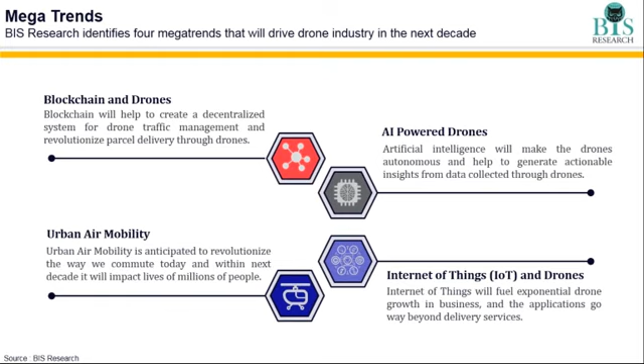However, the collected data is meaningless if it is not converted into insightful results. But thanks to technologies like data analytics, the collected data can now be converted into actionable insights. To give you context, the acquisition of data analytics provider Redbird by drone service provider Airware way back in 2016 shows that the roots of this trend go way back in time.

Now, I cannot emphasize enough that drone delivery is another major avenue that will solve real life problems. The usage of drones for parcel delivery is currently very limited owing to factors such as absence of a traffic management system, improper regulations, lack of trust in current technologies, etc. However, thanks to the ongoing efforts by FAA and NASA, the condition is changing and it is changing very quickly.

The third shift the industry is currently observing is from hardware to software. To give you an example, in 2016, a drone manufacturer in the US named 3D Robotics completely shut down its drone manufacturing business and became a drone service provider.

Another shift is the UTM system, which is expected to be a decentralized system involving a lot of stakeholders. At present, a series of companies ranging from drone service providers to retail giants to communication companies are all collaborating with NASA in order to create an architecture of UTM.

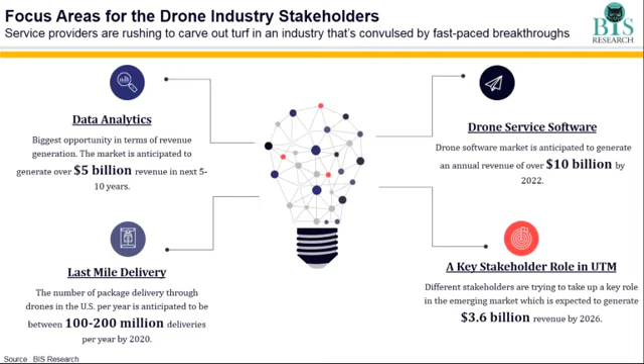To talk about LiDAR, before the advent of drones, it was largely limited to collection of aerial data through airplanes. It was a costly affair and involved a lot of human intervention. But since the advent of drones, LiDARs are now being used in surveying historical sites and agricultural lands to gauge weather changes, and all of this is being done at less cost and more efficiently.

Now, if you talk about sense and avoid systems, and you are someone from the regulatory authorities, you don't want to wake up to the news of a flying drone colliding with a manned aircraft and claiming lives. But thanks to sense and avoid systems and the developments in this area, this fear is diminishing day by day. For the successful implementation of the UTM system as well, the sense and avoid system needs to be 100% perfected.

If you talk about battery, it is one of the vital parts of drones, and for the successful delivery of medicines or other parcels, the battery backup time needs to increase, and that's where more of the developments are going to come in the future.

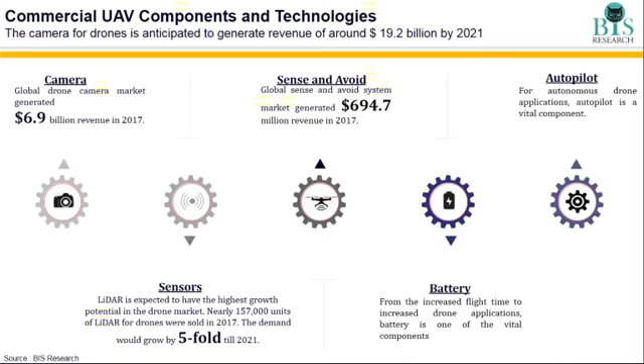Now let us talk about the geographical distribution of revenue generated in the commercial drone market. North America is clearly the dominant region in this sector. Players from across the value chain, be it component suppliers, manufacturers or software providers, are all present in the region. Interestingly, the leading drone manufacturer DJI, headquartered in China, which has acquired nearly 65% market share in the commercial drone industry, considers North America the region contributing the major share of its revenue.

Asia Pacific is just next in line. The declining cost of drones is one of the prime reasons behind their wide acceptance in the price sensitive countries of the region. Along with that, urbanization and industrialization have driven a high demand for drones in these countries.

Now, if you talk about Europe, a very interesting thing about European countries is that many of them opt for a very liberal approach towards the adoption of drones. In France, beyond visual line of sight operation has been allowed in many parts since 2012. And in Germany, Domino's is delivering pizzas on the sidewalks in many parts of the country. However, different laws for drone usage in different countries are a big challenge, and that is being tackled by the European Union.

Now, on the basis of end users, drones are solving several real-world problems, be it increasing the yield of farmers through precision farming, efficiently detecting any leakage in oil and gas pipelines to avoid big accidents, or creating maps of mines in places which are inaccessible. The list goes on. And thanks to the technology, most of these works are being done effortlessly and efficiently.

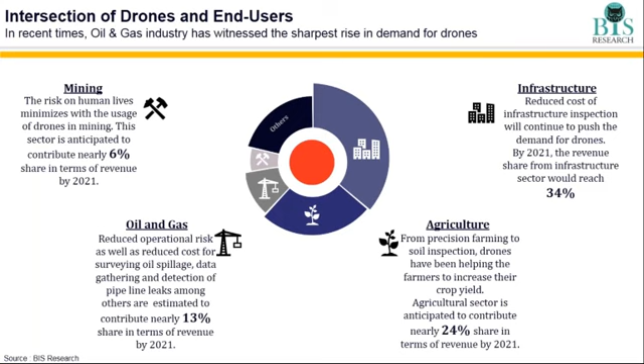I would like to invite Mr. Chris to throw some more light on the end user perspective of the drone industry.

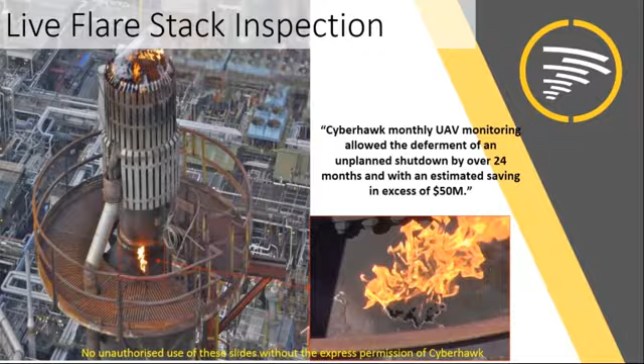Here we have a flare that is in the North Sea, and what we can see is a circumferential crack around the flare tip, and we can see a lifting pad that is coming off the flare tip. Now what you're not able to see in this image is that this is 125 meters off the deck, and the flare tip overhangs the structure of the platform, and should this piece of metal fall onto the platform below, it would definitely have catastrophic results for the plant if it fell on a piece of pipework or a valve, but similarly if it fell on somebody's head, it would kill them.

So we monitor this defect, we measure it, we send a team out there every month, and the oil company is then able to verify that the crack is not getting any larger, they're in control of the defect, and no need to shut down the asset. So all the time we're trying to save the facility from being shut down. If you go to the next one, please.

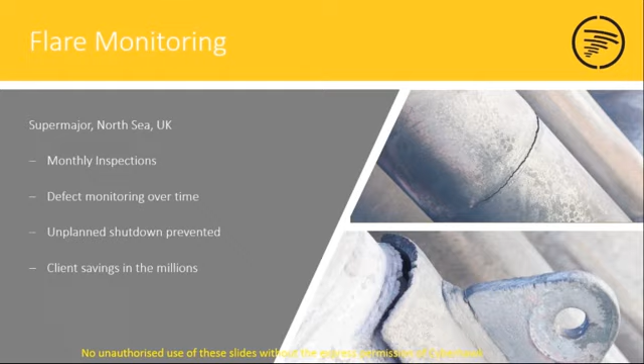Another example, these are all big numbers. This time we did a flare inspection in Nigeria, and we inspected 5 flares in less than a week while the plant was completely operational. They didn't believe that they had any issues with the flare tips, and we found that 3 of them were severely damaged, and they ended up ordering new flare tips on the advice of our findings.

And one of the limiting factors with the design and manufacture of flare tips is that if you wanted to order a flare tip today, it would typically take you more than a year to receive that new flare tip. They don't keep them in stock. They're made of exotic stainless steel materials, and they're made to order. And if an oil company wants to buy one at short notice, then they get charged an awful lot of money for the short turnaround of that.

Some facilities keep spares, but in this case, this facility in Nigeria did not have spares. And so they were able to order their replacement flare tips in time. They didn't have to shut down the asset to do the inspection, and their figures in terms of savings were $11 million savings to the client. So all the time when people ask us how much money we're saving, it tends to be in the millions of pounds. Next slide, please.

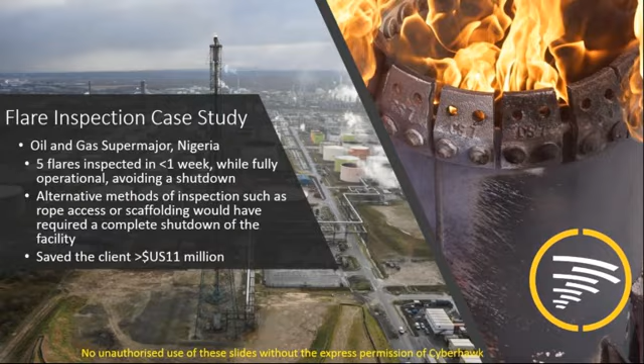Another use case that's very familiar to me and close to my heart is doing underdeck inspections. In this case, the underside of an oil and gas platform offshore, very difficult to access. When I was working offshore, I would wear a safety harness, roping, caving equipment, and I would abseil underneath the platform, and then I would use wire slings, pass them through the structural steel, and then I would maneuver underneath the deck. Quite dangerous and very difficult to do. If you go to the next slide.

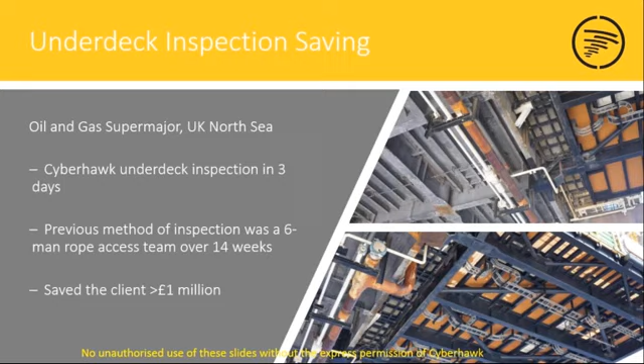For this particular platform, we were able to carry out the underdeck inspection in 3 days. It was done previous to this by a 6-man rope access team, and it took them over 14 weeks to do the same type of inspection that we've just done in 3 days. So saving the client over £1 million. Next slide, please.

At the same time that we can do the underdeck inspection, we try and inspect all of the difficult, cumbersome places that there are to do inspection offshore. So we'll fly right down to the water level, and we'll inspect the jacket legs, which is the structure which holds the platform up. We'll inspect the risers and the caissons, which are the pipes that bring the oil and gas up from the seabed, all without the need for anybody to put themselves in harm's way.

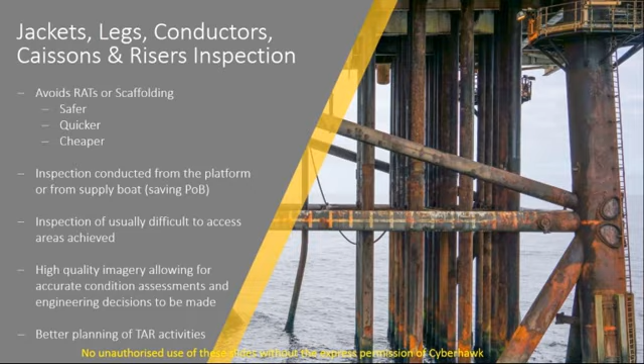And if you go to the next slide, we recently did an inspection campaign offshore where we did 64 platforms in 6 weeks. The inspection was all done from the back of a boat. Much faster, tangible results, so 100% access to all areas with imagery to back up those findings. And another way that the drones can really be used to save time and money. Okay, next slide, please.

One of the most recent world firsts that we did was the internal inspection of a cargo oil tank. And as I speak, we have a team in Singapore carrying out the internal inspection of a cargo oil tanker. We fly around all the structural components within the tank, and we get close-up visual inspection of those areas. And because of our knowledge of the defects within those tanks and our inspection background, we're able to classify and describe the findings within those tanks and do it completely remotely.

Just to give you an idea, the saving for staging: this oil company, if we weren't able to do it with a drone, would have used staging or scaffold, and for the tanker alone, it was a $1 million saving for just the scaffolding. And next slide, please.

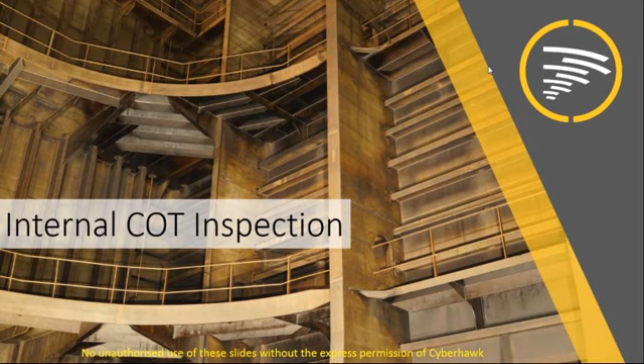Here you can see the drone in the foreground. You can see we use a number of different drones. In this case, you see the Falcon 8, but we also use the Flyability Elios. We fit lights to the drone and we fly, as you can see, near a bulkhead there, sort of a wall within the tank, and we're inspecting the web and the flange of the structural steel.

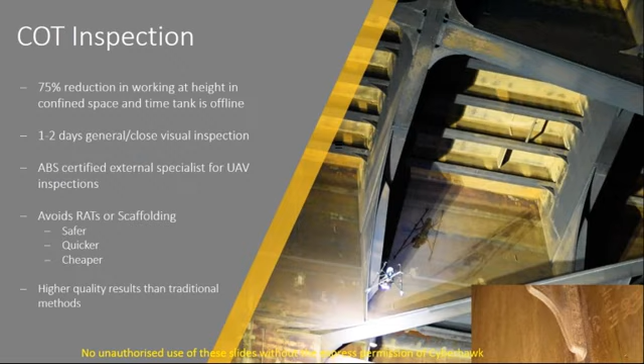A 75% reduction in working at height. It took us 1 to 2 days per tank. And of course, nobody needing to climb or work at height. I must say that at the moment, we are still required to go into the tank. We are in there flying with the drone, watching it, because the sense and avoid systems aren't reliable enough. But it's still a far cheaper and safer way of doing it than using rope access or scaffold. And next slide.

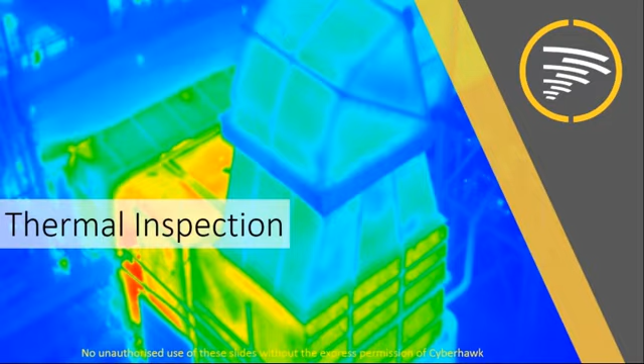So when we carry out inspections, one of the tools that we always carry with the drone is a thermal camera, infrared. If you go to the next slide, you'll see that we can use a camera to determine hotspots. This is a radiometric camera, which means that every pixel on the camera can give you a corresponding temperature reading. What you must do first of all for it to be accurate and valid is test the emissivity, so you need to know the values. So test the camera on the ground with a similar material so that your corresponding temperature range is reflective of what you find when you fly.

And in this case, what we're able to find on this ducting in a refinery is that some of the panels of the insulation had fallen off. In this case, they're indicated with a slightly yellowing color scheme. And that means that the internal refractory on the inside had fallen off. So the refinery owner is able to order materials ahead of time before the shutdown, before the turnaround, and be prepared. Next slide, please.

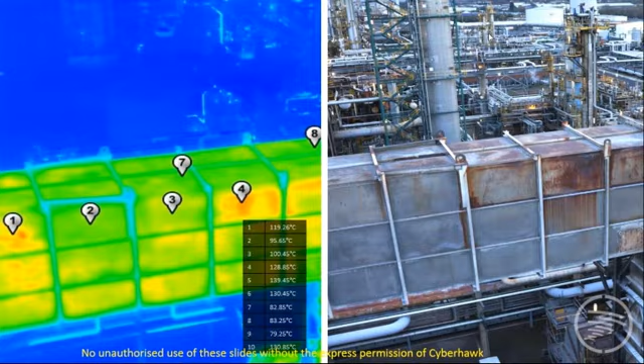Thank you so much, Chris, for sharing all those live case studies, and Mr. Gaurav for defining drones and how their capabilities can be leveraged in commercial business operations. What we understand, definitely drones are not just a fad. They are here to stay and soon will become mainstream. And I believe that the $12 billion market opportunity that we at BIS Research forecast for the drone industry is just touching the tip of the iceberg in terms of new ways of conducting business. And we see drones headed for new heights in business, and as rightly pointed out by Chris, the world is full of economic potential and it is likely to be multiple times that number. With that thought, ladies and gentlemen, let me conclude today's session.